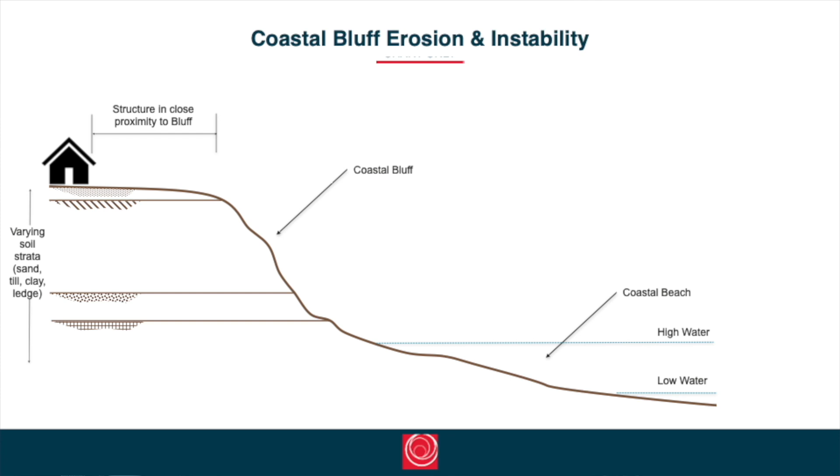So, yeah, Pete gave a really great summary of a coastal bluff system. This slide doesn't look quite as fancy, but basically here we're showing a typical coastal bluff where we might have a structure in close proximity to the bluff that the owner would like to protect. A steeper coastal bluff that's subject to erosion, and beyond the toe of the bluff, a coastal beach. And when we start to look at a site like this, we want to understand what are the risks, what are the contributing factors to erosion or instability of a bluff like this.

One of the common factors is erosion of the toe due to exposure of erodible soils to wave action, to high water, to the coastal forces from storm events. And so we need to make sure that we are providing some form of protection to that toe. And we need to plan for that level of protection to be effective both in present conditions, in the current storm exposure, as well as ideally in future conditions as well.

With increasing sea levels and increasing storm intensity, there's potential that the toe of that slope could be subject to greater levels of risk. So we want to implement some form of protection for the toe, and I've shown a few images there on this slide that range from harder solutions through softer solutions. And it's really something that needs to be evaluated for each site to determine what is appropriate based on the level of risk for the site.

So we do try to move toward implementation of green solutions as much as possible, but in environments that are subject to greater coastal erosion, sometimes it is necessary to incorporate a stone sill or a stone toe. We've also used some options like utilizing tree logs to stabilize a toe. And then another option is to use a coir log material, so that's a biodegradable coconut fiber-based material.

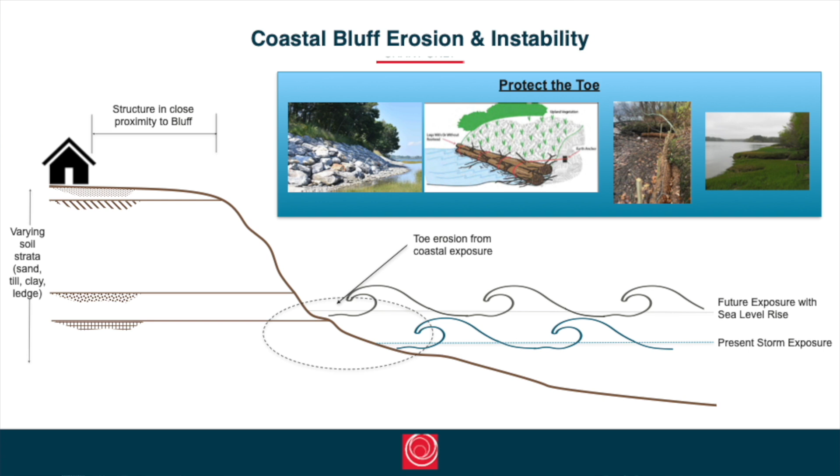Another important issue is how you deal with upland site water. Pete talked a bit about this. And so some of the issues that we see are when upland site water is not managed well, surface water runoff can run down the slope, can contribute to superficial erosion of the bluff. Water, as Pete mentioned, can also infiltrate the bluff soils and contribute to instability.

Another issue is instability of the bluffs. So a bluff that's been eroding may be at a very steep slope that really is steeper than is stable for the soil conditions that exist on the site. So often on bluff projects, we're looking to cut the slope of that bluff back to a slope that can be stable for the conditions on the site.

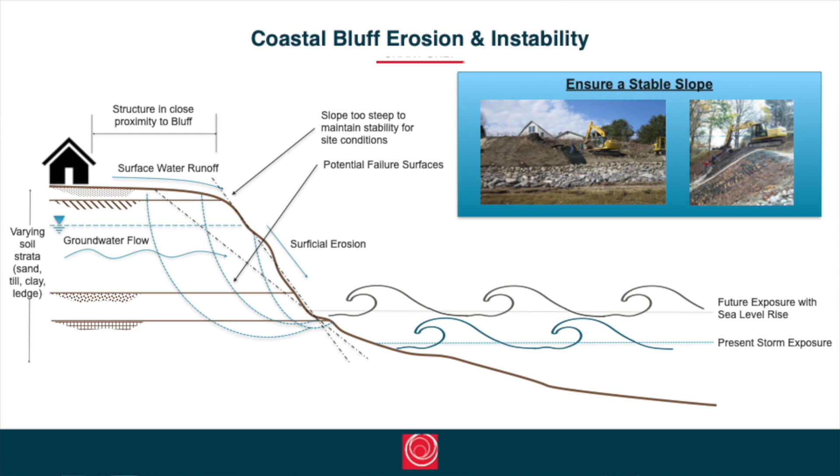Now, one thing you can see here is that when I show the regraded slope, I'm basing the toe of the slope on basically keeping it at the existing location of the toe of slope. So typically, in order to work within the constraints of state and federal regulations, we are trying to keep the toe where it is and not extend further into the coastal wetland. So cutting the slope back does mean cutting into the upland property, and that can be a challenge in some cases, especially when there's a structure close to the bluff crest. But that can be an important element to stabilizing a bluff.

And then it's also important to think about and look at what vegetation exists on site. When there are healthy trees near the top of the bluff, set back sufficiently from the bluff, the root structure can contribute to keeping the area stable. But as Pete described, when there are trees that are on the bluff that are actively being undermined, that can actually start to be a significant problem, where it can put more of the bluff at risk of greater instability if those trees fall and carry much of the bluff soils with them.

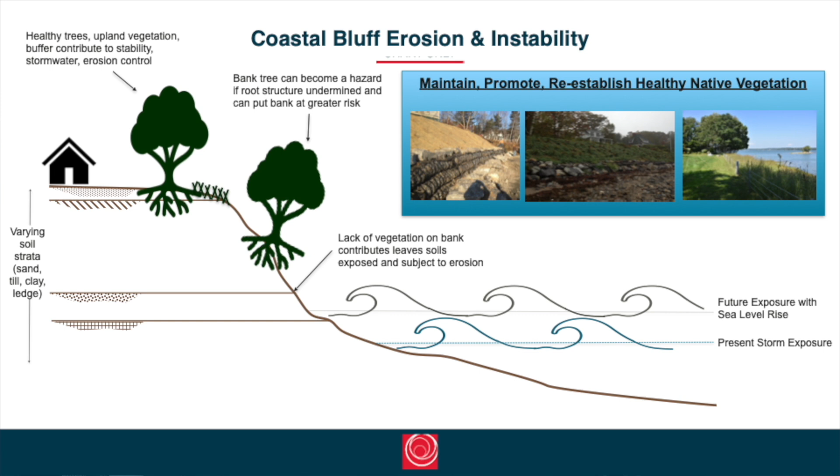Management of vegetation on coastal bluffs is a very important aspect. Often on projects, when there is a bluff that lacks vegetation on the bluff face, we'll look to reestablish vegetation, utilizing reinforcing mats for the surface, and then replanting the surface with native species to revegetate that surface. And then also often incorporating vegetated buffers at the top of the bluff, which can help to absorb some of the stormwater from the site.

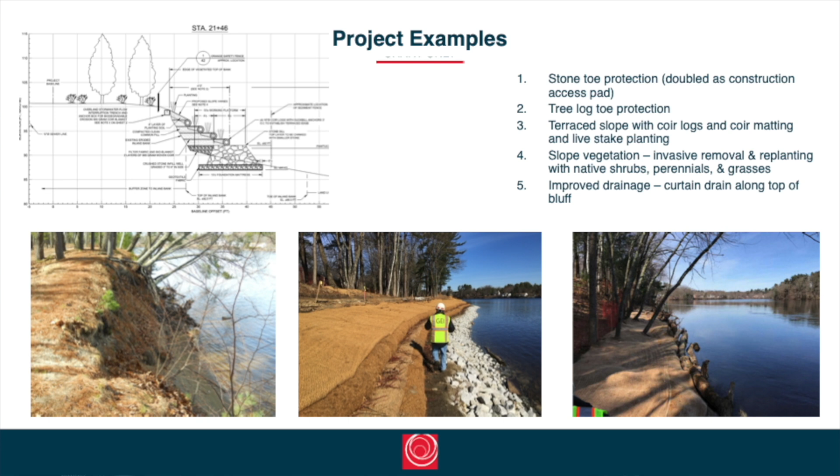And then above that toe protection, the slope was reconstructed using a series of terraces that were built using coir logs, so that natural coconut fiber material, with live stake plantings. You can see a little bit here, there's stakes sticking out between those terraces. So those eventually will establish and grow additional vegetation on the slope. And then the slope itself was planted with native shrubs and perennials, and drainage through the area was improved by including a curtain drain along the top of the slope to intercept the runoff from the upland sites.

This is another example a little closer to home. This is a site on Casco Bay. This was a residential coastal embankment that was eroding. And in this case, a number of different solutions were employed. One was that the bluff that was experiencing erosion did have a slope that was steeper than ideal to maintain a stable slope for the conditions on site. So the slope was cut back to provide a stable embankment slope. A stone toe was incorporated, but really just including stone for the section of the bottom of the slope that's under greatest attack from coastal forces.

And then above that stone toe, the slope was reinforced with a biodegradable mat and native plantings. And then in front of the slope, there was a section of fringe marsh, and portions of that were restored by incorporating coir logs and replanting sections of that marsh.

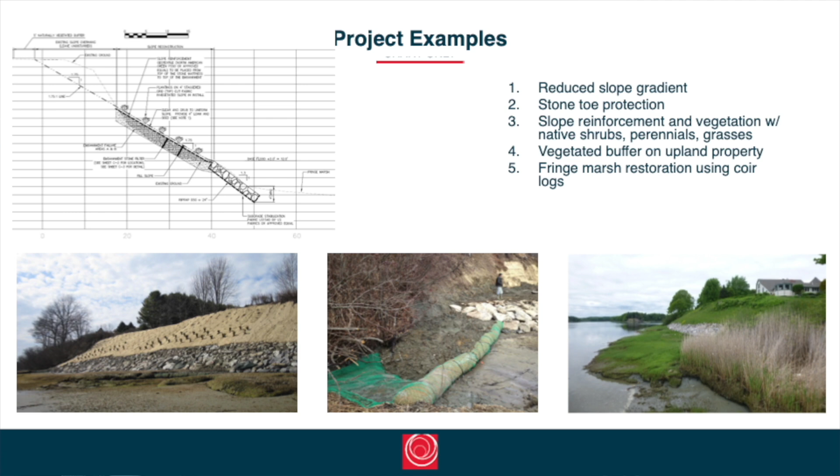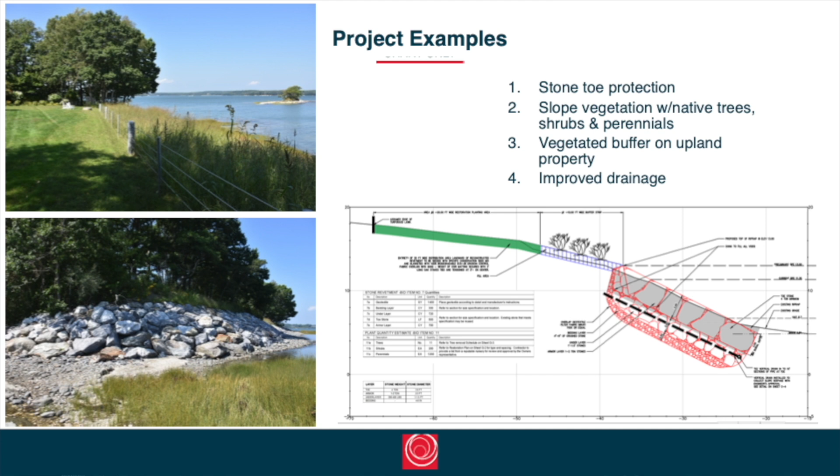This is another example. This one's in Yarmouth. Another residential shoreline project. And again, this section of shoreline was eroding, and the owner was interested in protecting it to prevent further loss of that section of bluff. In this case, again, it's a fairly exposed location, so we did incorporate a stone toe, but then above that toe, incorporated a section of planted bluff and a vegetated buffer between the edge of the lawn and the bluff itself. And you can see in the image here where there's actually a fence line which keeps that area kind of protected and separated so that the vegetation is allowed to establish and flourish in that area and perform beneficial functions.

This is another project also in Yarmouth, and this was a residential site. The shoreline here was eroding. They also had problems with invasive Japanese knotweed on this slope, and some of the erosion issues at this site were related to upland runoff and how that was running down the slope and not managed well in this area. So this project incorporated again a small section of stone toe to protect the toe, and then the slope itself was revegetated after removal of invasives. It was replanted with native species, as well as a biodegradable mat on the slope surface.

And an important aspect to the design here was that drainage from the site was improved. So drainage was redirected through a drainage ditch and to a plunge pool where it was redirected through an outfall through the stone toe.

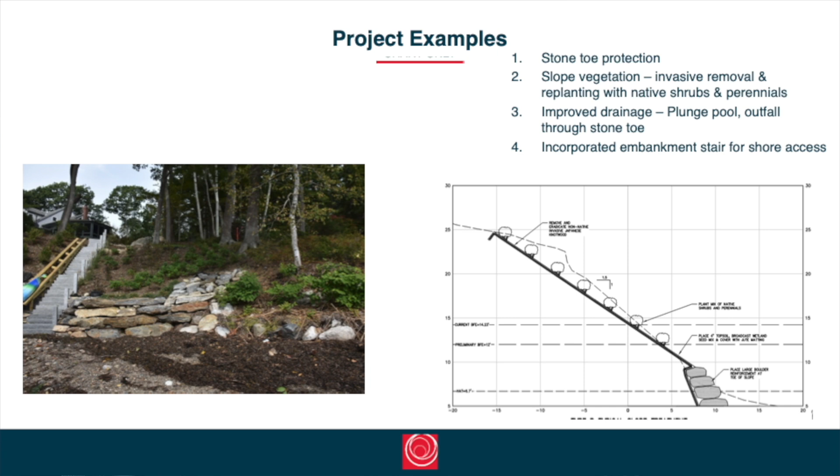This site also incorporated an embankment stair, so sometimes when bluff erosion projects are undertaken, it's also a good opportunity to think about, are there ancillary projects that you can implement, improving shoreline access, for example, at the same time the project is done. All right.

So I just wanted to summarize and end here with some key takeaways that I think are important to take from this presentation as you think about bluff stabilization projects. One is that every site's unique. So as we go into a project, it's important to identify what the specific challenges are with that site, what the specific risks are, and have multiple tools in the toolbox to deal with those risks.

Some sites will tend more toward softer solutions, and in some cases fully green solutions. Others, just due to the level of coastal exposure, require some amount of hardening, but ideally that hardening is done in combination with green methods as well.

So again, starting with defining the problems and the goals, it's important to identify what the constraints are to any coastal bluff stabilization project. That includes physical constraints of the site, regulatory constraints, understanding what are the thresholds that you should work within so that you can design a permittable project, as well as constructability constraints, and also financial constraints, especially with private property owners. There are limits to how much can be spent on projects, so sometimes design decisions have to be made based on those constraints.

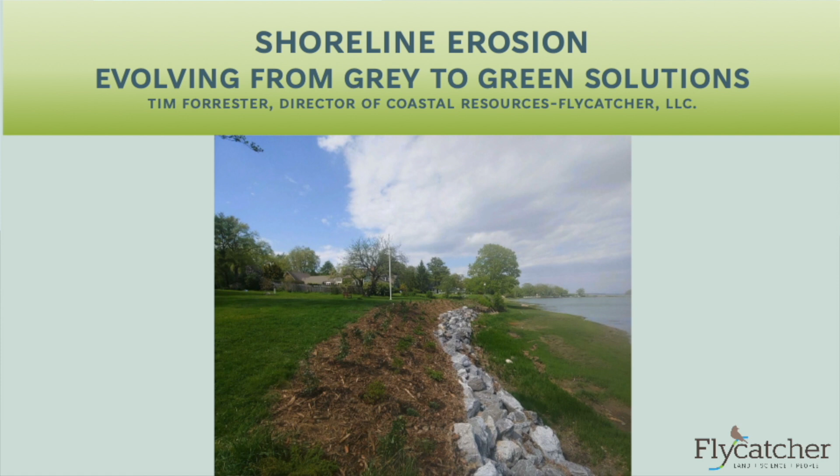So this is one of the projects that we're currently working on, and it's currently under review, so hopefully we'll get some good blessings from this today. And I brought up this slide because for me the fun part is when you actually come onto the site and you start looking around to figure out what's happening here, why is there erosion, what are the conditions, what are the circumstances. And as you can see, there's a fairly large house pretty close to the shore. There's a pretty good expanse of lawn. There's a few trees left.

But one of the things that I look for is actually not what's happening right here on the site, but what's it look like next door. So I'll walk into the woods and, what are the dominant plant species? What kind of trees are out there? What does the shoreline look like on the undeveloped piece adjacent to it? And then kind of use that information to come back and start working on the rest of the project.

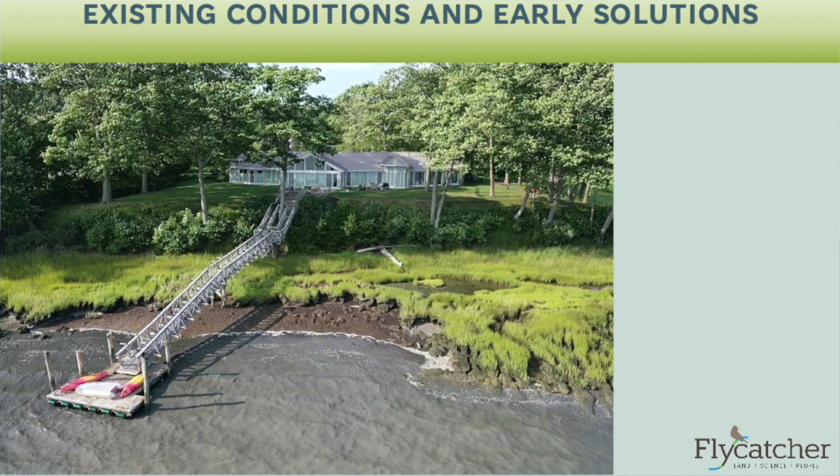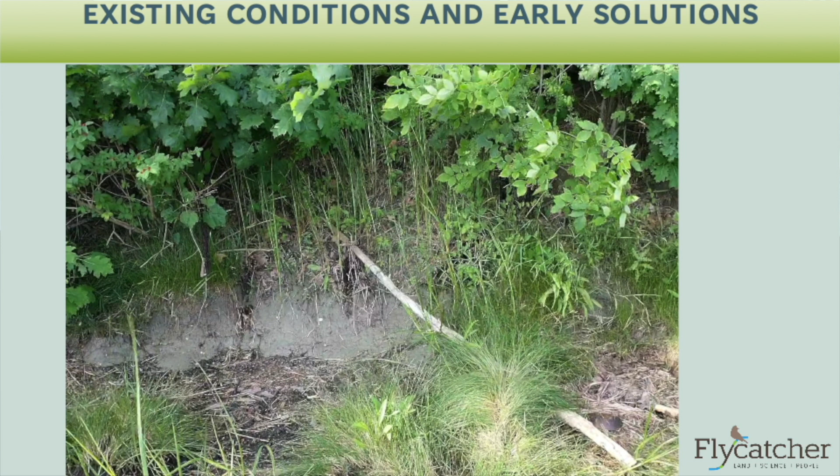You can see that the slope itself is vegetated, but upon further look, a lot of this is oak that's been topped, so they're maintaining their view, which I get. You can see it's a lot of clay soils. It's starting to get undercut. So this is somewhat in the early stage of a site that is potentially going to have some issues.

The more significant areas, you can see this undercut slope. It actually extends up probably 4 to 5 feet in the worst places. But there's also a fringing salt marsh in front of it that's nice and healthy. There's a little gap in between where the salt marsh is and where the upland is now, probably because that's where it's eroded. You get a lot of the rack line will settle in there and smother out that salt marsh a little bit.

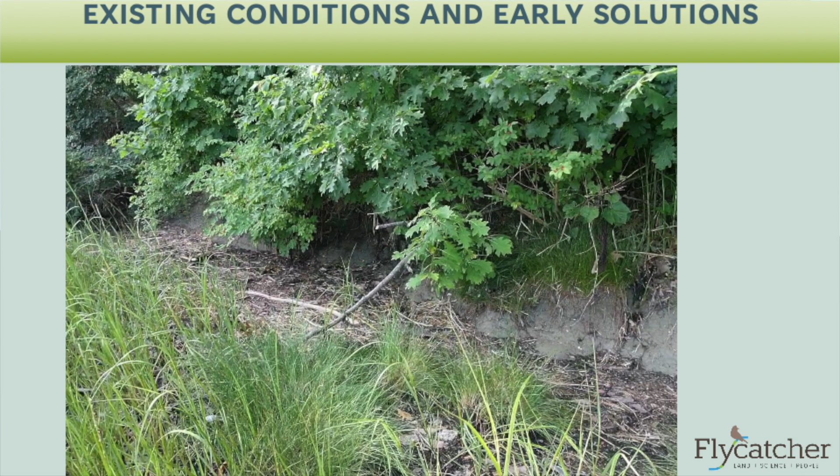There's significant undercutting underneath the trees. You can see these old roots. There's also invasive species in here. There's nightshade, there's poison ivy. Neither one's very useful. But the big issue is at the top of the slope where the existing lawn runs along, and you can see this line right here where it's starting to fail. So if steps aren't taken, the potential for a rotational failure exists here where this whole slope can potentially let go.

And it's the same thing on the other side. Pretty typical of a lot of sites. A nice lawn. This particular one, they cut down on the slope. I guess you can't see what I'm doing over here. They keep this area on the top of the side slope trimmed back as well.

So how to fix something like that? The big thing is reestablishing that upland buffer. So we have a pretty robust planting plan along the entire side slope up onto the lawn and going back at least 10 feet. So the whole thing is about a 20-foot area from where it's cut now up onto the lawn along the entire stretch that's been managed, if you will, for the view. But then down on the toe of the slope, there's some things that need to happen as well.

And in this one, it's significant enough and steep enough in here, or a tall enough scarp, that we decided to just use standard riprap in that area. And also underneath the dock, which is a whole other topic. You build the dock structures, you get a lot of shading underneath, and none of that vegetation grows. And really, riprap's one of the only ways to maintain that underneath so that you don't have a failure of the dock structure. But on the other side, the erosion's far less significant.

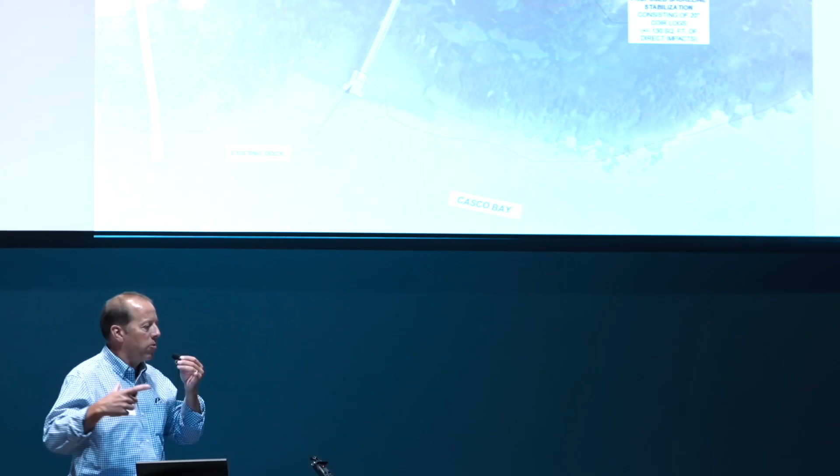So here's a tree that fell over a couple of years ago. It's probably 3 feet in diameter. No, actually, I think it's only about 24 inches in diameter. And it's smothering out the salt marsh down below it, but it's free structure. So we're going to grab that, spin it around, and cable it off at the toe of the slope and fill that scarp area that's just starting to erode.

And then beyond that, we're tapering down coir logs that'll be helical anchored down into the clay. And clay and helical anchors have tremendous holding strength. So that's going to work really well along that toe. And it's kind of a preemptive process here. We're getting a hold of this before the big failure happens.

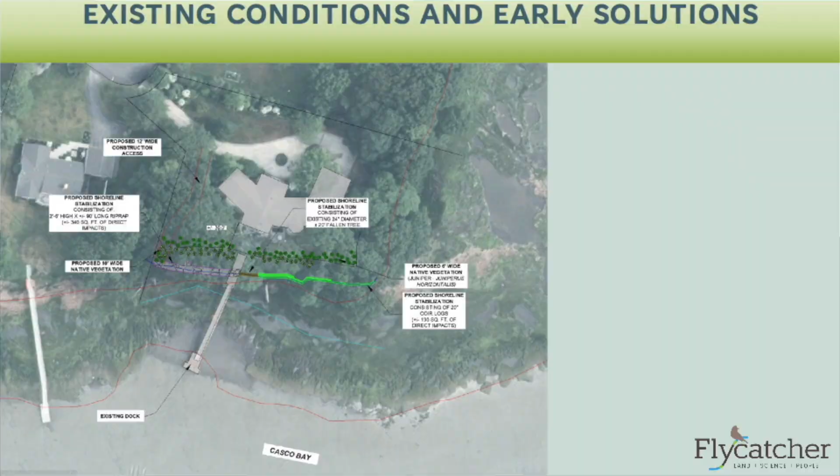And then we're trying not to do anything where the vegetation is thick and lush, other than asking them not to trim it anymore. And then above that, these are the areas on the side slope and up above that we'll replant.

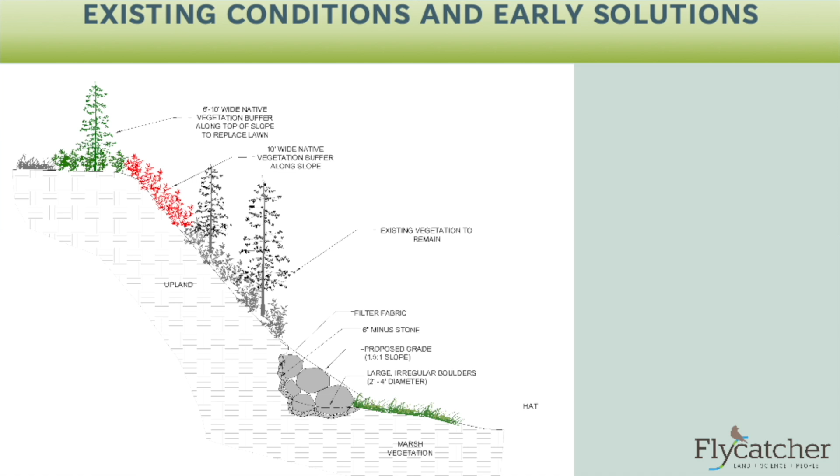I've been working a lot with Seth Wilkinson, who couldn't be here today, and I told him I'd share some of his information. So Seth and I have been looking at projects up and down the coast a lot in this area on how to deal with this from a more green approach. And as you've seen in some of the other standard slides that the others have shown, a typical scenario shows the fringing salt marsh and what happens when that gets knocked out, and then the failure of the side slope as that comes along. Fine print.

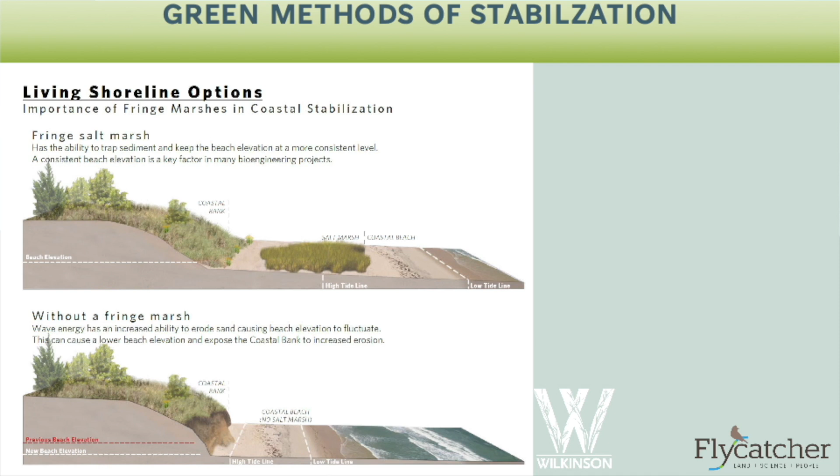So one of the things that we can do here is to try to reclaim that fringing salt marsh, and we're using coir products again and taking coir fiber and organic material and basically building a pillow or a blanket and locking that into the ground, and then pre-planting that with dune grass and setting it to an appropriate elevation so that as the slope changes and that starts to become more wet, it'll sprout up and you'll regain that fringing salt marsh, which helps protect the toe of the slope.

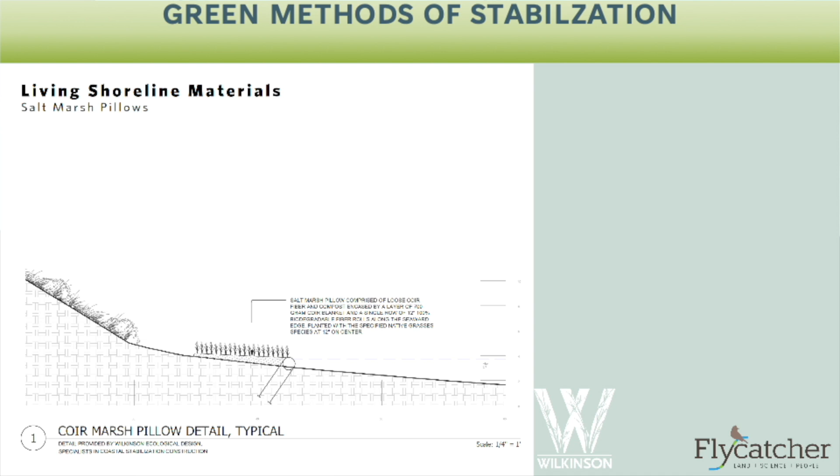So another implementation of coir log use on significant sloped projects, and these can be done all around here, not just in sand environments, but in some of our clay environments as well. Using the coir fibers, the same helical anchors, but also setting what we call a lift down in behind that, and you stack and tier this as you go up. And the concept behind it is that these are below grade, and you're putting material over the top of this and then replanting it.

And the idea is that area gets to stay stable. Some of it may get eroded over time, and you may lose the toe of the slope. You may lose some of those bottom plantings, but you still have this coir underlayer that is able to withstand the storm surge.